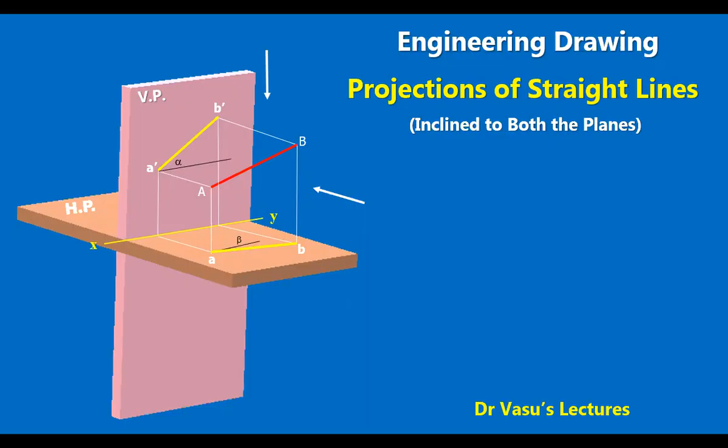I'm your Dr. Vasu. Now we are going to see one more problem on a line inclined to both the planes. Here, the front view of the line is given at 50 degrees angle and also measuring 55 mm. So angle and front view lengths are given. And the top view is 60 degrees inclined to XY line. So top view inclination is given, that is beta is given, but length is not given. Its end A position is given, and we are asked to find the true length and inclinations.

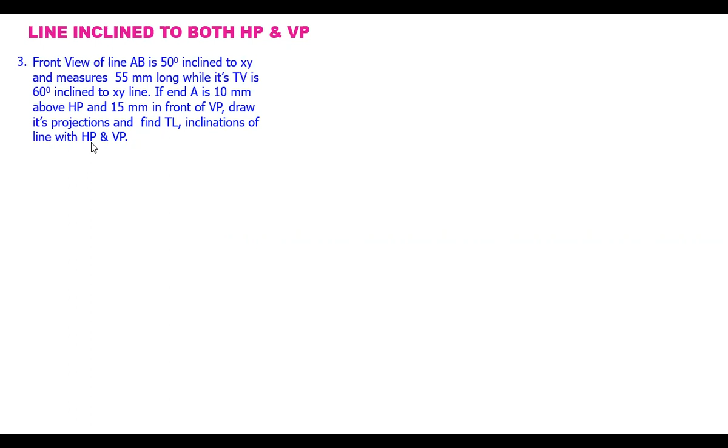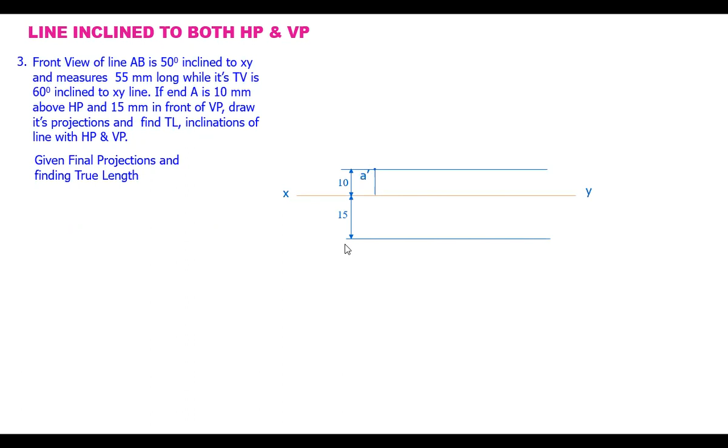Okay, so final projections are given, and from this we have to find the true length. Let us see how to represent. So the point A is 10 mm above HP. Draw a line here at 10 mm and mark a point here on the line. So this is A dash, front view, and 15 mm in front of VP. So draw another line here in front of VP at a distance of 15 mm and if you draw a projector from A dash, we get a here on this 15 mm line. So one end of the line is marked.

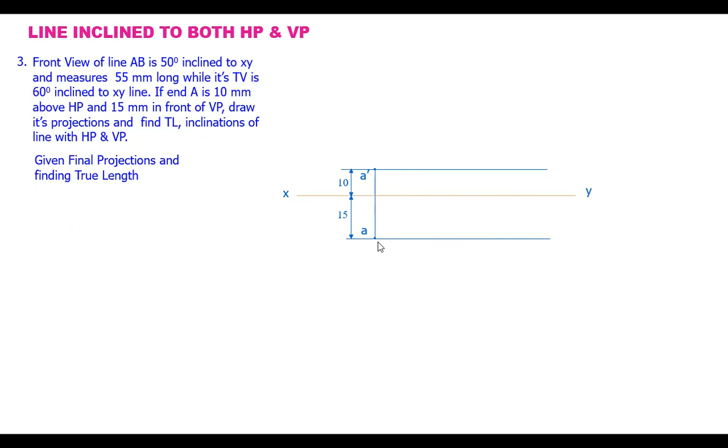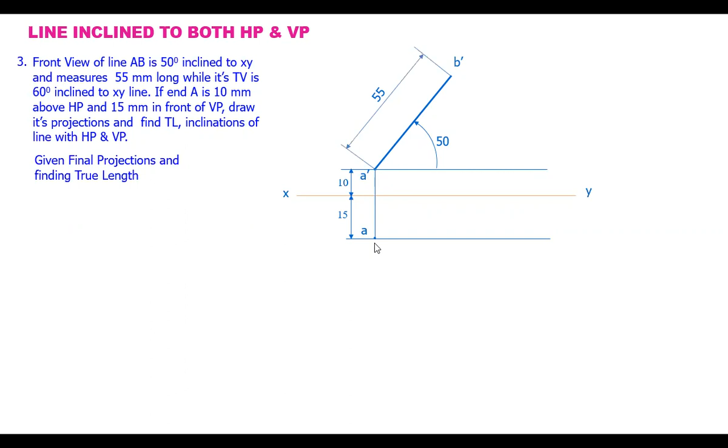Now let's mark the front view at 50 degrees angle. At 50 degrees angle, we draw a line which is 55 mm long. So this point is B dash. So A dash B dash is the front view and its length is given and it's marked. Now what else? Top view is 60 degrees inclined to XY line. Top view means AB. AB is at a 60 degrees angle.

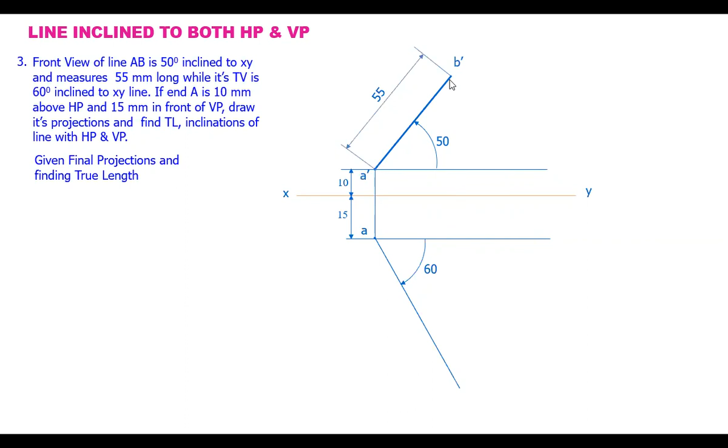So at 60 degrees angle, we draw a line and point B is lying on this line somewhere, we don't know. Okay, so to get this, we know that B and B dash lie on the same projector. So from B dash, if you draw a projector, this intersection point is nothing but B. So the point B is lying on this line as well as on this projector. Highlight AB. So we get finally AB, the final top view of the line, and A dash B dash, the final front view. This angle is alpha, this is beta. And we are asked to get the true length and the true inclinations with the HP and VP.

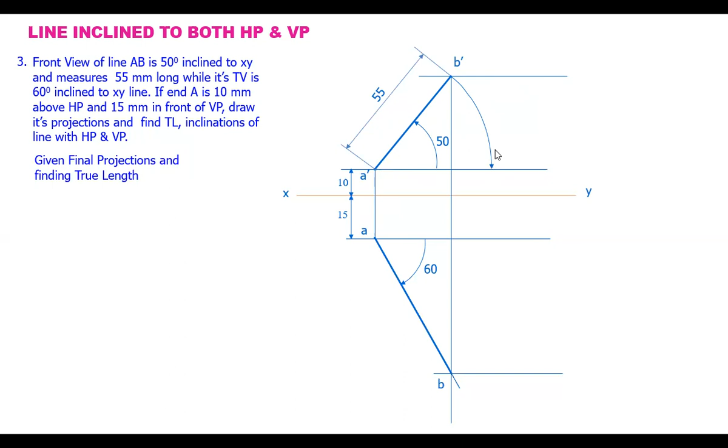Let's see how to get it. Draw a line here passing through B. This is the locus of B in the top view. And passing through B dash, you draw another line. This is the locus of B in the front view. Now, with A dash B dash as radius, A dash as center, rotate this point B dash downwards, and it moves as an arc of a circle until this is parallel to the horizontal plane. So from this point, draw a projector onto the top view, onto the locus, and we get the point B2. This is B2 dash actually. So here we get B2.

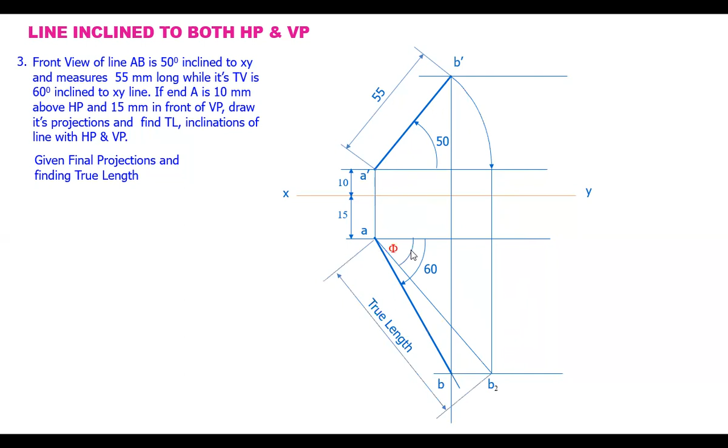And what happens? This is the line which is parallel to HP. When the line is parallel to HP, in the top view, we see the true length of the line. So AB2 is the true length of the line. You can measure the length of this line AB2, that is the true length. And also, if you measure this angle, this is angle phi, angle with the vertical plane. So we are able to get angle phi and also the true length of the line.

Once you know the true length of the line, take the true length as radius, and from A dash, draw an arc cutting this locus at a point. This point is nothing but B1 dash. The meaning of it is the line is assumed to be parallel to VP. When it is parallel to VP, in the front view we see the true length of the line. So join A dash B1 dash. This is the true length. Of course, by taking the true length, we mark it.

Now, this angle is the angle with the HP, that is theta. So we are able to find the true length of the line and true inclinations of the line with the HP and VP. Like this, we get the required data and final projections. Okay.